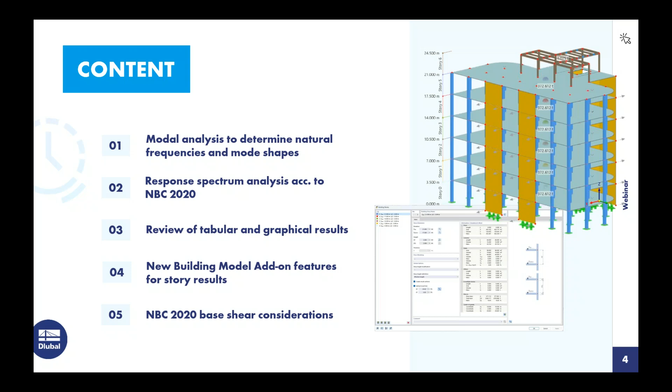So before we begin, I want to discuss the NBC 2020 earthquake methods of analysis that are given in Article 4.1.8.7. So we do have the equivalent static force procedure that is provided in 4.1.8.11, and this is certainly a simplified approach for seismic design. Now, this can be applied for buildings that are of seismic category SC1 or SC2, given in Table 4.1.8.5-B.

It also can be applied to regular structures with a height less than 60 meters and a fundamental lateral period less than 2 seconds. We can also apply this simplified approach for irregular structures, and we would refer to Table 4.1.8.6 to see what categorizes a structure as irregular. But the height must be less than 20 meters, and that fundamental lateral period must be less than 0.5 seconds.

Then we have the dynamic analysis procedure in 4.1.8.12, and this includes the response spectrum method, the time history method, or the nonlinear dynamic analysis. And this should really be applied to all structures that do not satisfy the simplified requirements set forth in Article 4.1.8.7. For today, we'll move forward with the response spectrum method for our structure.

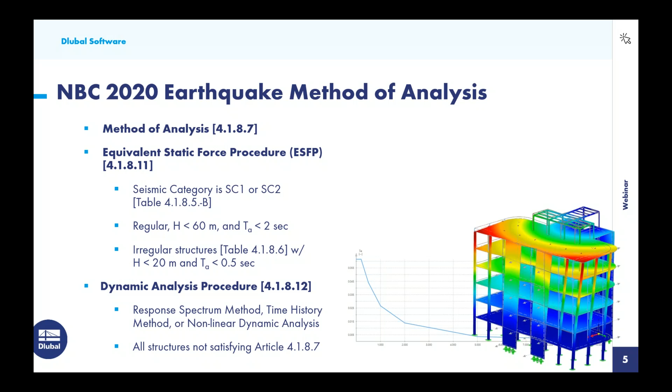So we'll begin in RFEM here, where I have already modeled our multi-level story structure. So we'll quickly go over a bit of the model input as shown over here in the RFEM 6 navigator on the left. So we can see our input materials, and a majority of the structure is defined here as a concrete material with a compressive strength of 40 MPa. But we also have a small steel structure up at the roof level here with a material of A992 steel.

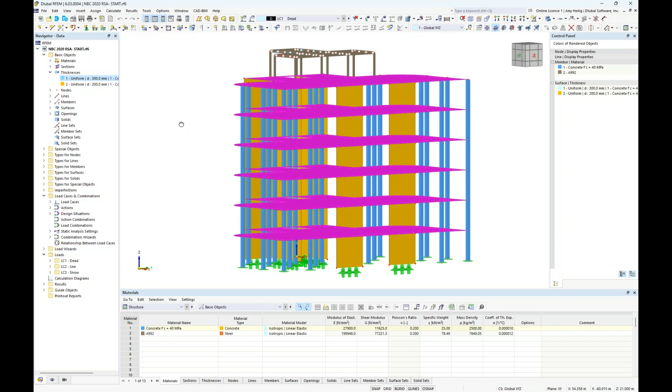As far as our cross sections, you'll notice that our concrete columns that are spanning between floors are just going to be square 350 millimeter by 350 millimeter concrete rectangular sections. And then as far as our steel members, we have several W shapes defined directly from the RFEM 6 CSA library. And finally, we have the thicknesses defined of our surfaces. So this would include our floor slabs here, which are defined with a 300 millimeter thickness. And then we have the thickness of all of our shear walls, which are going to be defined with a slightly smaller thickness of 200 millimeters.

So that's just a basic overview of the structure, but we would also like to take a quick look at the applied loading that, again, I've already added to this particular model. So within our dropdown, we have 3 simple load cases, all gravity loads. The first is going to be our dead load, and this is going to be a surface area load of 3.5 kilonewtons per meter squared applied at every level. We also have a live load, with a modified magnitude here of 2 kilonewtons per meter squared, again applied at every floor level. And finally, we have just a general snow load at the top level here of 1.5 kilonewtons per meter squared. So now that we have reviewed the overall structure and the loading, we want to move forward now with our modal analysis.

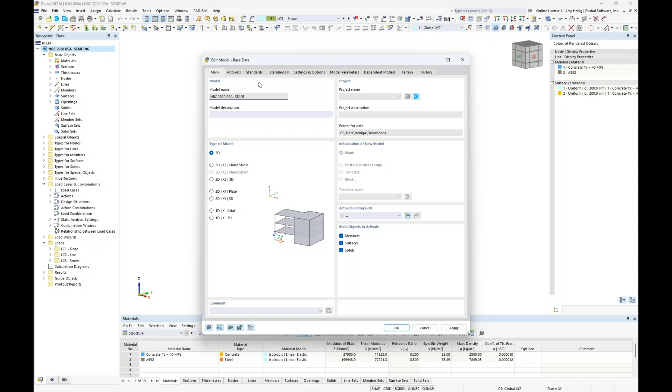So we want to right-click on the model name here in the project navigator to visit what's called the base data dialog box. And this dialog box would be presented to you when you first create a new model within RFEM. But on the second tab are all of our optional add-ons.

So to quickly explain the configuration of RFEM, the base program itself allows us to fully model the structure, including all of the materials and cross sections from the library. We can apply loads and run a basic static analysis. But the minute we want to move forward with design according to the various standards, we would activate one of these add-ons, for example, concrete design, steel design, timber design, and so on. And in particular, today, we want to activate our dynamic analysis add-ons, and we'll begin with the modal analysis.

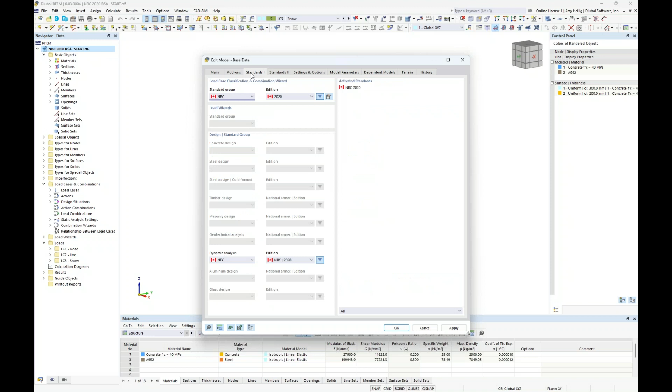So on the third tab, we will generate our load combinations automatically according to the NBC 2020, but we see all of the relevant international standards that are available in the base program as well. And because we have activated now that dynamic analysis add-on, we will go ahead and reference the NBC 2020 here.

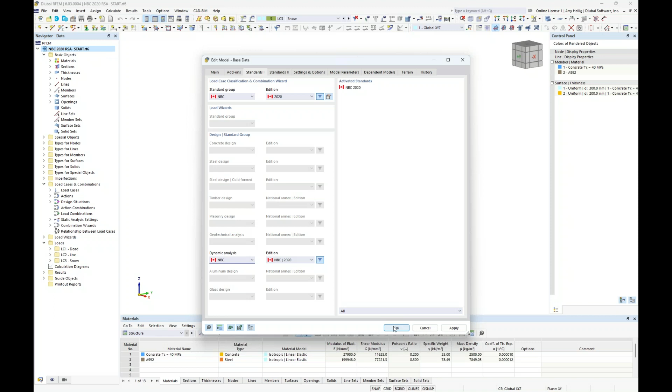So once we have activated that add-on, we will go back into the program and we want to visit our load cases and combinations dialog box. Well, we can immediately pull that up here by editing the active load case. And again, under the load cases tab, we see those 3 simple load cases that we just reviewed, dead, live, and snow, but we're going to create a 4th load case. And the load case name is going to be modal analysis.

Now, because we have activated that add-on, you will notice here that within the dropdown, we now have a new analysis type called modal analysis. And this is only available because we have activated that add-on. So you'll also see a lot of these settings immediately modify in comparison to the static analysis. The first thing to take a look at is the modal analysis settings. So we'll go into the edit dialog box here and we have a couple default options.

The first input is the method for determining the number of modes. So this is by default set to user defined, where we can directly put in the number of mode shapes we would like to solve for. And for today, I'm going to increase this to 10, but you can solve for 10, 20, 50, 100 different modes if you prefer. The alternative method in this dropdown is automatic to reach a maximum natural frequency. So you'll notice that we can input the maximum natural frequency and the program will determine the number of modes needed to reach that particular value.

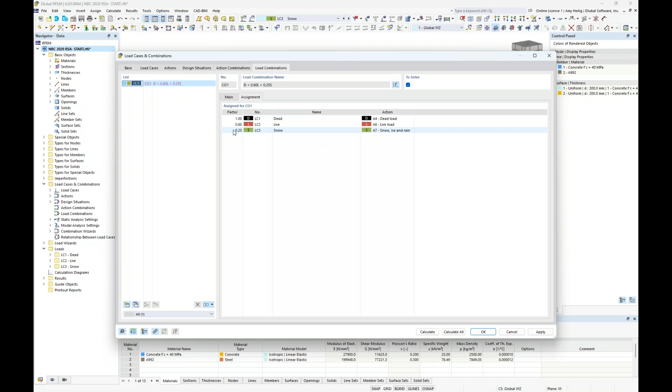And now when we jump to the load combinations, we will see all three load cases considered with the relevant factors directly from the NBC. So 100% of the dead, 60% of the live, and 25% of the snow. So jumping back to our load cases and under the modal analysis, we can now use our drop-down box here to select that mass combination. So now these relevant load cases will be converted to mass.

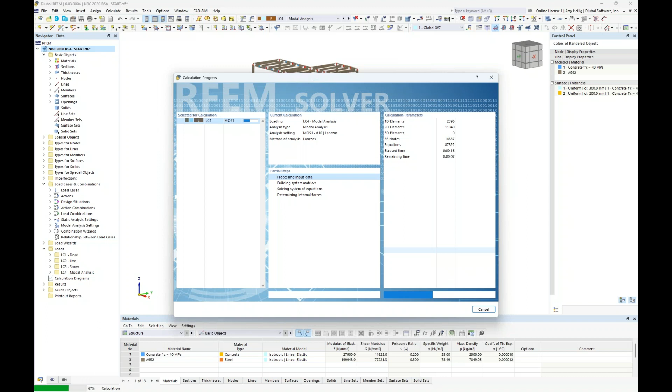Okay, we're now ready to run the calculation, so we can simply hit calculate under this particular load case modal analysis. The program will generate our FE mesh for us, and we are going to calculate a total of 10 different mode shapes. Remember, this is the input that we have input into the particular modal analysis settings. We will also consider the mass conversion of the particular mass combination that we have also set.

So when that calculation is done running, we can take a look at our results. And over on the left, we now have a fourth tab available in the navigator. And within our dropdown, we see here 10 different mode shapes that we can actually cycle through to see the response here of the structure.

So currently we're viewing the mode shape, and notice at the very bottom here, we have the ability to scale the mode shapes. Now the default option is set here so that the magnitude of the mode shape vector is set to a value of 1.0. That's why we see a max value here of 1.0.

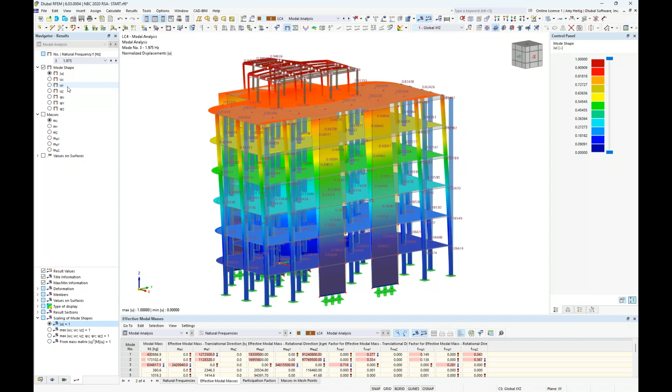But there are some different options we can easily toggle to if we prefer, but most likely we'll be utilizing this first option. So in addition to viewing the mode shape here, you'll also notice the ability to take a look at the masses on the structure used for this modal analysis. And if I zoom in here, we can actually see the mass magnitude at every single FE mesh point that was used in this calculation for our members, our floor slabs, and also our shear walls.

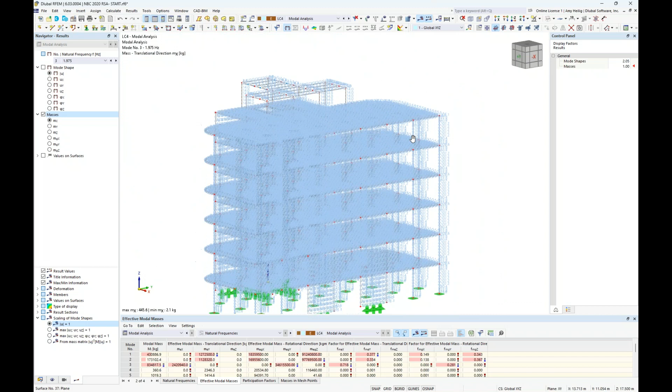So in addition to the graphical output, we certainly want to visit the tabular output here. So once this calculation is complete, we should also see the ability within our dropdown to jump to the modal analysis add-on to view our results here. And the first tab under the natural frequencies includes those 10 different mode shapes as well. So we can kind of cycle through these by clicking in the table, and notice the graphics will automatically update.

But this allows us to view the angular frequency, the natural frequency, and the natural period of our structure for those 10 different modes. Now, it's really important to also take a look at the effective modal masses. And within this is going to show us our mass participation for each mode shape. Well, we can immediately tell what our dominant modes are here, just based on the most mass participation. So mode shape 1 would be our dominant mode in the Y direction. And we can also view mode shape 3 here, which would be our dominant mode in the X direction.

And down at the bottom of this table, we will actually get a summation here of the mass participation. So in the X direction, we have 72%, and in the Y direction, we have 89%. Well, if we refer to the NBC commentary, and currently only the 2015 is released, we don't have access yet to the 2020, but I would imagine it would say the same thing, in that a 90% mass participation is required for this modal analysis. And we're certainly not reaching that with these 10 different mode shapes here.

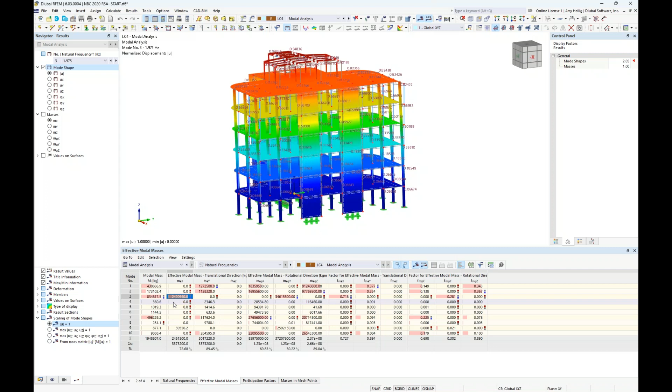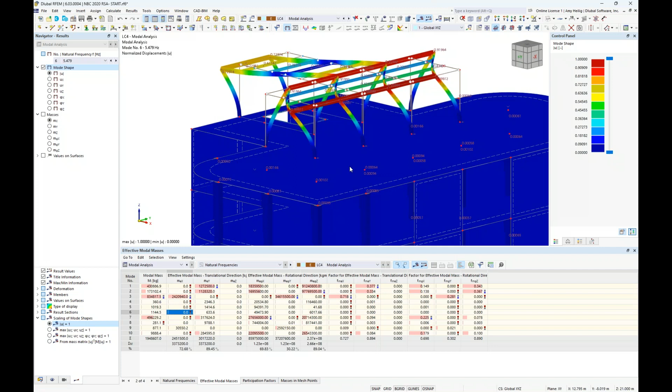Alternatively, if we take a look here at mode shape number 4, for example, you'll notice that really not much is going on with a majority of the structure. Rather, we're seeing a response up here for these smaller steel members only. Same concept with mode shape number 5 and mode shape number 6. So we term these usually as local modes, where again, not much mass participation, but we're seeing very little response for just maybe a few members. So I'd really like to eliminate these local modes in my calculation.

And we're going to go back to the modal analysis here and revisit these settings. Under the Settings tab, remember we have this currently set to no neglection, but what I would like to modify this to is to user defined, where I now have an additional third tab here to neglect masses of a particular object that I select within this dropdown. And for today, I'm going to deactivate the masses for all of my steel members located at that top level.

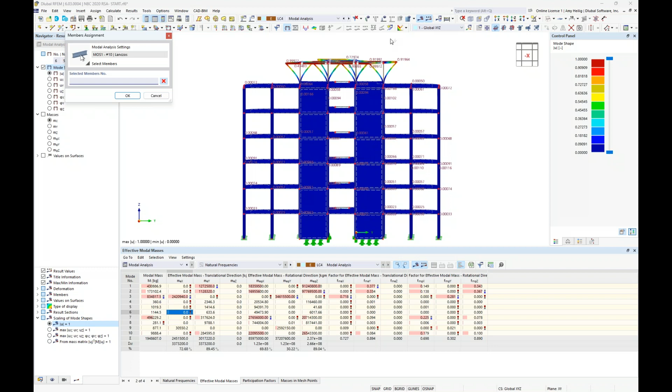And I can graphically select the steel members here. I'll turn off my results. Maybe I turn this into a rendered view by graphically using my selection box here to highlight all of the steel members. Now notice the member numbers are automatically populated. So now we're going to completely neglect the masses for those particular elements. But if we would still like to consider the masses and maybe just redistribute to a different area of the structure, we can do so.

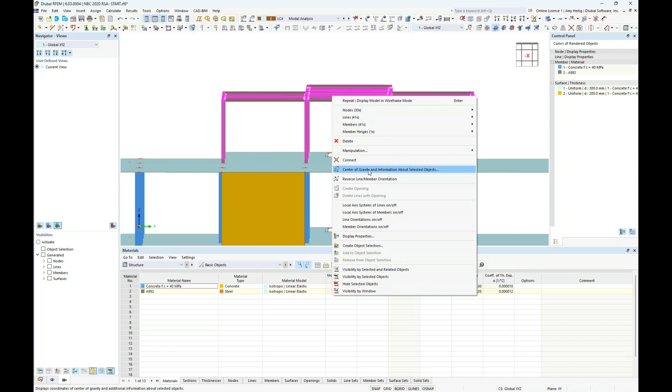So if I highlight all of these same members, again, these steel elements up at the top, I can right click to take advantage of this option here called Center of Gravity and Information about Selected Objects. And what you will notice is that the program will give me the total mass here of the selected objects, 3.075 tons. Well, I can take this a step further to generate a new node at the center of gravity with the selected objects, and we see that generated here in the background.

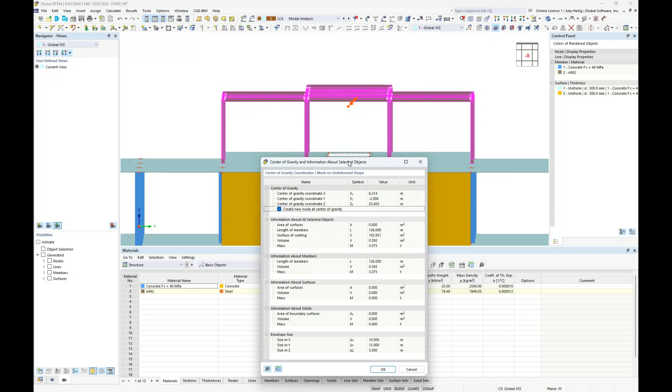So once I've created that additional node, I'm actually going to double click on it because I want to modify the Z elevation here to 21 meters. And by doing so, I just have simply moved this node to the top story here of the concrete structure itself.

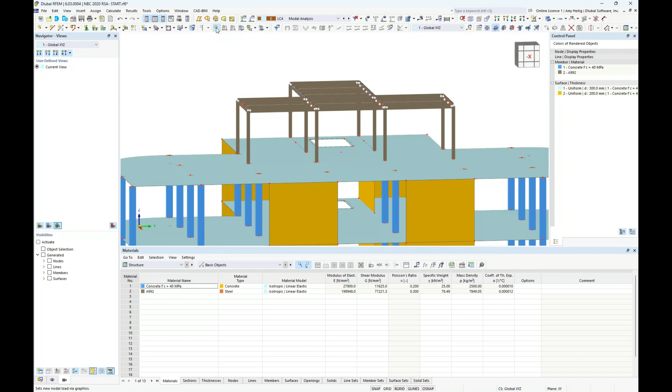Well, now we are going to apply a new nodal load. So I choose my option directly up here in my quick tools up at the top. And instead of the load type set to the standard force, we do have the ability to set a mass load type. And again, taking into consideration the total mass of those selected steel objects, I'm going to simply redistribute it here at 3.075 tons.

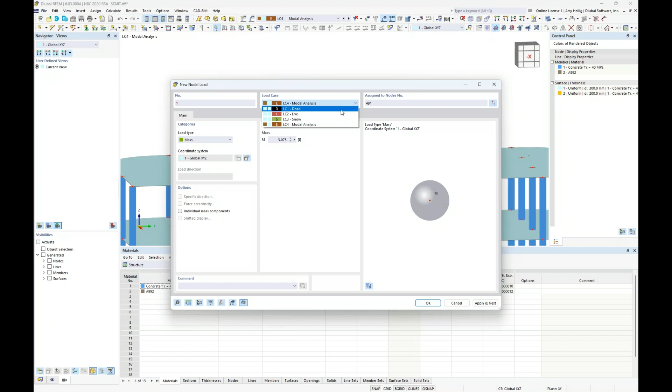And I'm going to apply it to node number 491, or we could graphically select that node. But we do need to make sure that we are under the relevant load case here. So we want to apply that to the dead load case. So when I click OK, the program asks me to delete the results, and we turn this into a rendered view here. And now we see that mass load applied directly to that node,

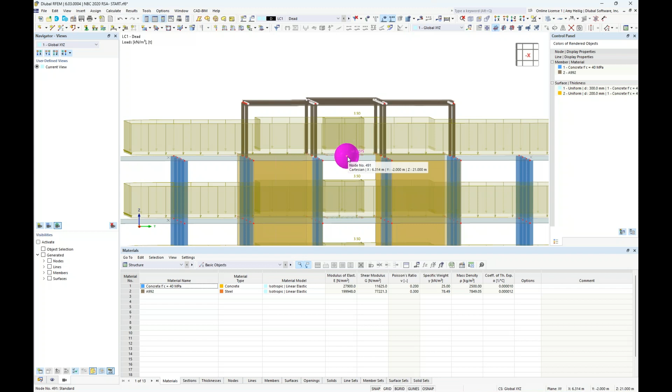again, at that top slab here of our concrete structure. So we have the ability to apply mass loading as nodal loads, as we just saw, or line loads, member loads, or surface loads to be considered further within the modal analysis directly.

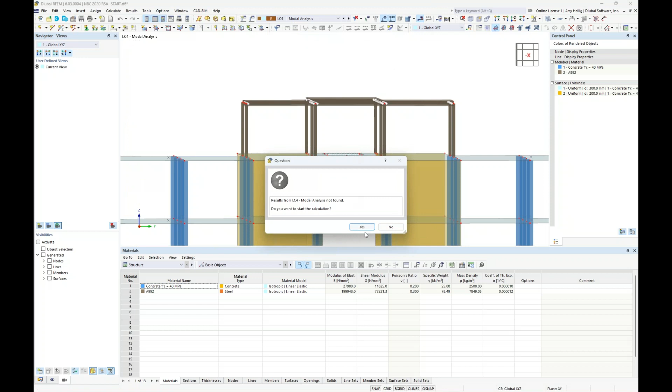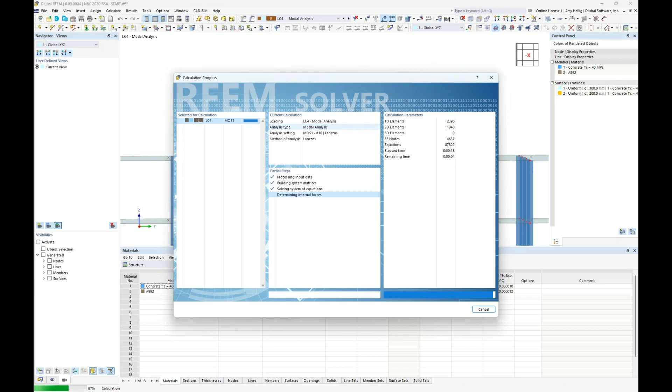So we jump back down here to the modal analysis. We're going to rerun this calculation, and remember now that we are completely neglecting the masses from the steel members, but rather we have now inserted that single point mass load at the top of the concrete structure to simply redistribute the mass. And our hope is, by still solving for 10 different eigenvalues, that we see slightly better mass participation.

So once the results are finished here, we can go ahead and zoom out to see the overall structure. We're currently looking at the modal analysis add-on and the effective modal masses tab. And we take a look at the bottom here for the summation of the mass participation. And now we have 96% in the X direction and 96% in the Y.

So you can see by eliminating those local modes, we don't need to solve for more eigenvalues, but rather what we see here for mode number 4 and mode number 5, that previously had not a whole lot going on for the rest of the structure, actually look quite good now with a response of the overall structure instead.

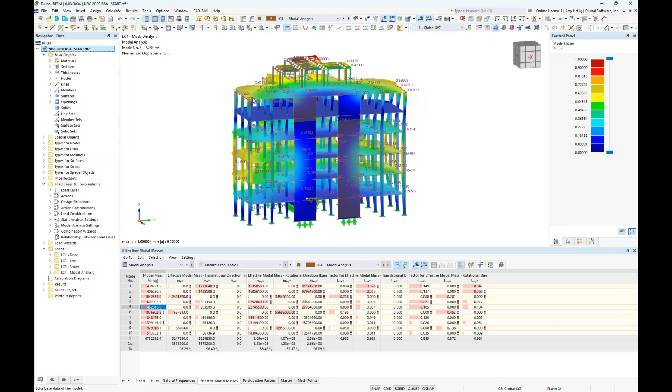Okay, so now that our modal analysis is complete, we have met those 90% mass participation requirements set forth by the NBC. We want to move forward with a response spectrum analysis. So we will go back to the navigator and the first tab here to revisit our base data dialog box. And under the add-ons, you can see that we also have the ability to activate our second add-on, response spectrum analysis.

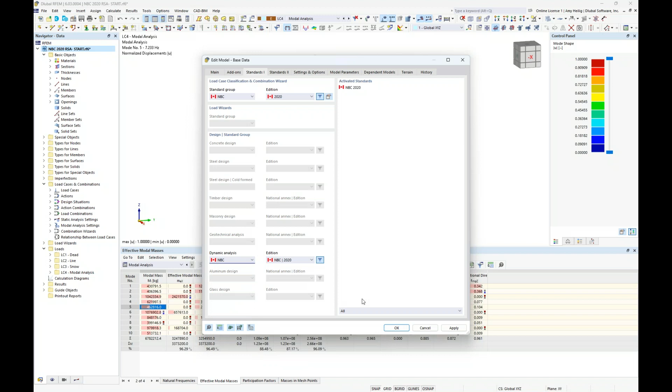And under the standards, we're making no modifications here. We're still running that response spectrum analysis according to the NBC 2020, but I just wanted to point out all of the other international standards that we have available, including the ASCE 7, the Eurocode, and several others. So we'll go ahead and click OK to get back here within the model where we will revisit our load cases and combinations dialog box.

So we will create a fifth load case here, and this one is going to be called RSA for Response Spectrum Analysis Design. Within our drop-down box, we now have a third option available to us, the response spectrum analysis. Now, before I get into some of these settings here on this first tab, I'm going to go ahead and go over the additional tabs.

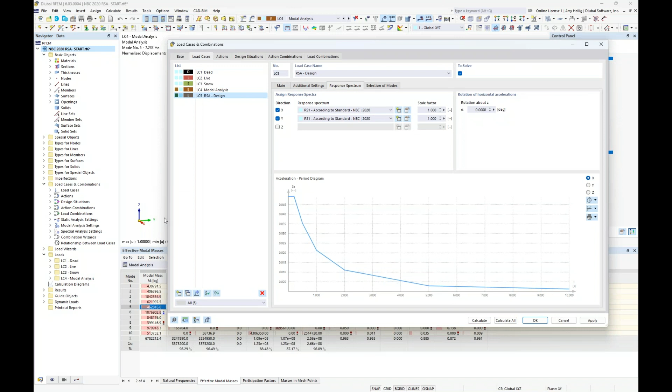As far as additional settings, this is actually not something that you need to worry about with a response spectrum analysis. With that dynamic add-on, it's really more relevant for a time history analysis. So we'll make no changes here. Under the response spectrum, we are interested in applying this response spectrum in the orthogonal X and Y directions. And this is just based on these global axes here in the background of the RFEM model directly.

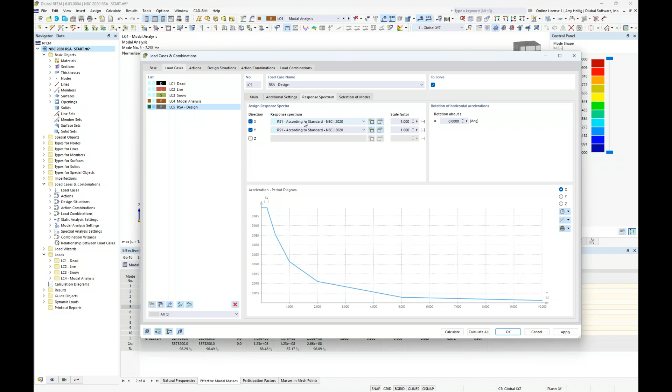Now, of course, if we were also interested in a vertical seismic response spectrum, we would activate the Z direction as well. The program has automatically set a response spectrum definition type here according to the NBC 2020, but we can go ahead and edit the settings within this particular definition type.

So as far as generating this response spectrum, we have several options within the dropdown. The first is user-defined, where notice that you can input directly the period, the frequency, the acceleration, and this diagram will be automatically created based on this input. Alternatively, we have the ability to consider from an accelerogram.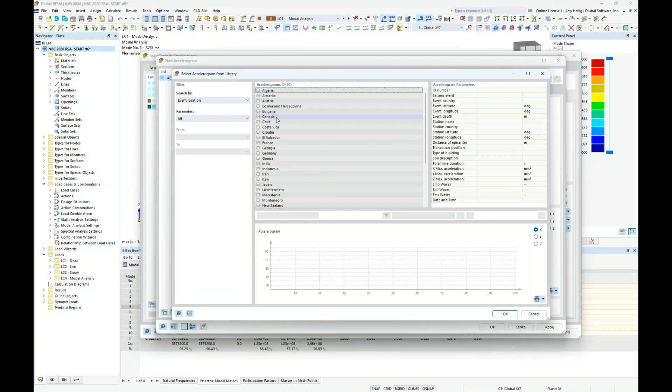So with the accelerogram, we can take a look at the RFEM library directly, where we have several recorded earthquake events from all the various countries, including Canada here. So we could select one of these particular accelerograms to be considered for our response spectrum analysis.

Now, finally, the last option here is according to the NBC 2020, which is what we'll be moving forward with today. Now, it's very important to note here that under the spectrum type, we have two options, the elastic and the design. We'll actually touch on this at the end of the presentation today, but for now, we want to choose the design spectrum. And once we have set the spectrum type, we do need to input several variables here, including the spectral response acceleration for the various periods.

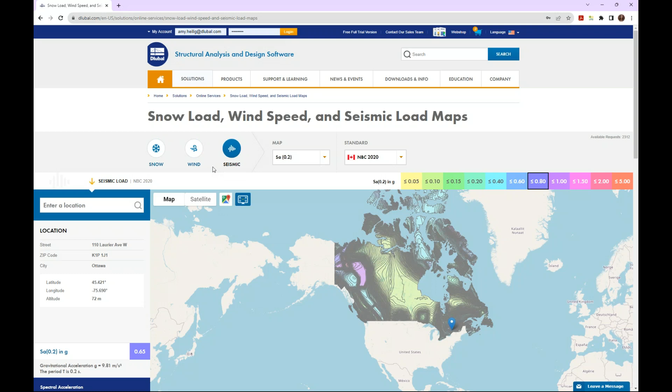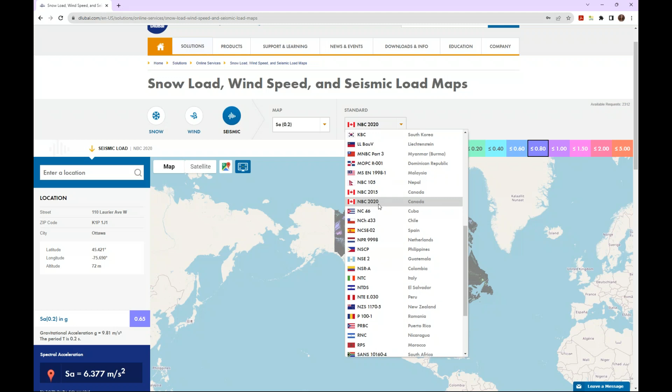Well, I wanted to point out that if you do visit our website at dlubal.com, under solutions, we have what's called the snow, wind, and seismic load maps, or in other words, our geozone tool. So you can see the various hazards that we can select at the top here. And for today, I have selected the seismic. And we also have implemented multiple standards from around the world, including the ASCE 7, of course, the NBC 2020, and all of the rest of the standards available here.

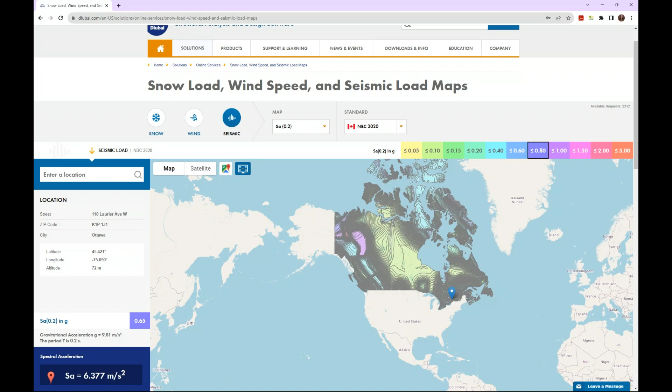So once we have selected our standard, this is also integrated with Google Maps technology in the sense that you can simply input your project location, such as an address or perhaps a city. You can go ahead and select as well within the drop-down these several options that are needed for a response spectrum analysis, and the program will instantaneously return the correct information to you, again, based on the NBC. So maybe a little bit more efficient than flipping through maps. So certainly take a look at this GeoZone tool available on our website.

So once we have this information, we would of course input it into the table here. We would also set additional factors such as the importance category. So for today, perhaps we set this to normal. We would set the site coefficients such as the site class, and today we'll set this to site class C. Then we also have the ductility related force modification factor, R sub D, and the overstrength related force modification factor, R sub O. Once all of the relevant information is input here, we see the response spectrum diagram automatically created down here at the bottom.

So we go ahead and click OK, and we want to ensure that that response spectrum is applied in both the X and the Y directions within this dropdown. The final tab here is the selection of modes. So what you'll see listed are the 10 different eigenvalues that we solve for from the modal analysis. And what's nice is that we also get a nice summary here of the mass participation in the X and Y directions. So 96% in both the X and the Y directions, as we have already taken a look at the previous results back in RFEM.

Well, if we are interested in deactivating some of these mode shapes with very little mass participation, so for example, if we set this to 4%, notice that a couple of these modes are deactivated, yet we can still double check to make sure that we're still meeting this 90% requirement, and sure enough, 96% in the X and now 94% in the Y. Well, this just allows us to maybe speed up our calculation quite a bit without having to worry about some of these mode shapes that are not contributing much to the mass participation of the overall structure. So in this case, modes number 8 and 10 will be unchecked here.

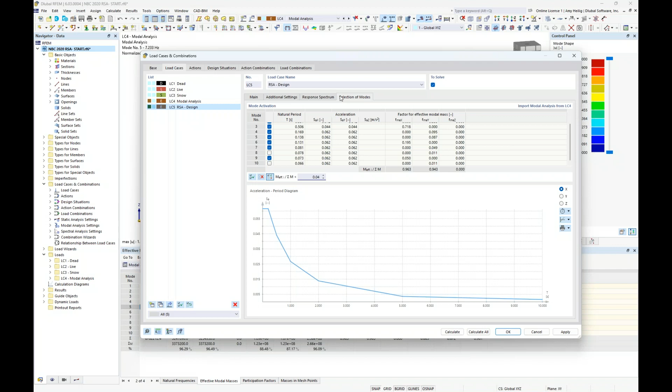So now that we are complete with these additional tabs up at the top, we go back to the main tab to talk about these spectral analysis settings. And again, by default, we do have a definition type set here. This will allow us to set the modal combination method for the periodic responses, and we have 3 different options available. We can take into consideration damping for the CQC rule, and we also will need to set the combination of the directional components, again with 3 different options available here.

So this is a really important topic, therefore I'm going to jump back to the PowerPoint to explain this in more detail. So we'll begin first with the modal combination method, and that's that first drop down available to us. So I'm going to jump ahead here in this PowerPoint to what you would ultimately see in your result output once we do run this response spectrum analysis. So remember that we're solving for 10 different mode shapes, or maybe we've deactivated a couple of those.

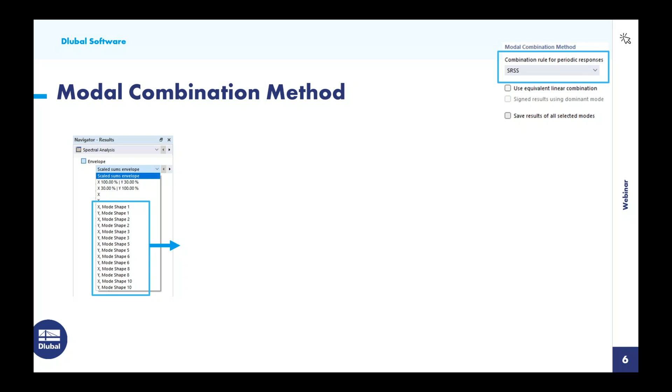So we're going to apply this response spectra analysis in both the X and the Y directions for all mode shapes selected. However, we need to somehow combine these so that we get a single response in the direction X and a single response in the direction Y. And within this dropdown, we choose the method of how these will be combined.

The first is going to be the square root sum of the squares, the SRSS rule. And this is where we're going to combine the max results by squaring them, adding them together, and taking the square root. Of course, you'll notice that when we do this, we will lose the signage. The second option looks very similar here, but you'll notice that we have an additional coefficient epsilon that's included within this equation, and this is the correlation coefficient. The equation for epsilon is shown here, and the big difference between the CQC and the SRSS is we have the ability to consider damping.

And finally, we have the absolute sum. This is just where the modal analysis is conservatively superimposed. So certainly, again, the most conservative approach. So once we have chosen the relevant method, what we will see in our result output is, again, a single response in the X and a single response in the Y.

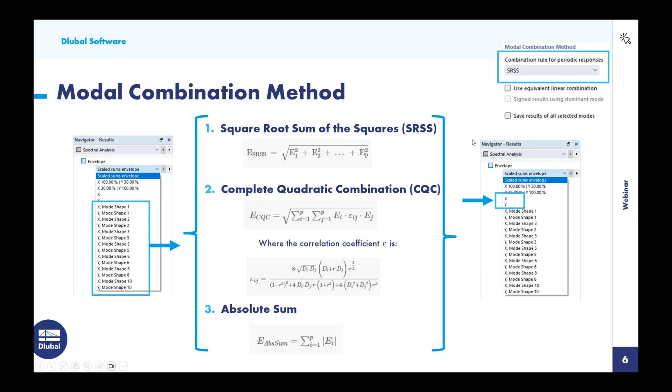So the standard SRSS and CQC combinations, those first 2 methods that we were talking about, inevitably we're going to lose the corresponding internal forces. And what I mean by this is that if we take a look at, for example, a column's max axial force, we'll lose the corresponding moment in the results when we combine these. This is why we have an additional checkbox option right below this called the equivalent linear combination. And this will essentially give us a more realistic result as well as the correct signage.

So taking a look at the square root sum of the squares, SRSS, with this option checked, we see the modified equation shown here. Very similar, we have the CQC with the linear combination checked. Again, we'll see how these formulas vary slightly from the formulas shown on the previous page without the equivalent linear combination activated.

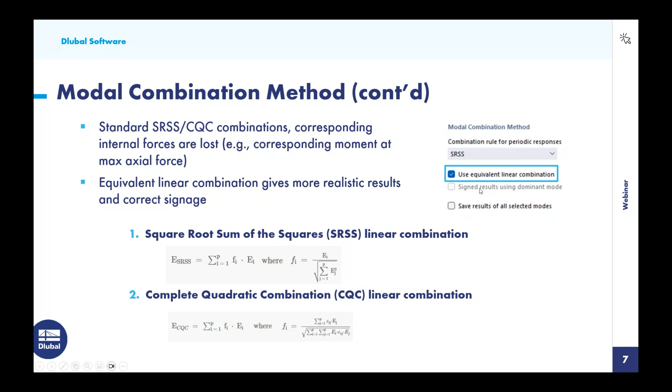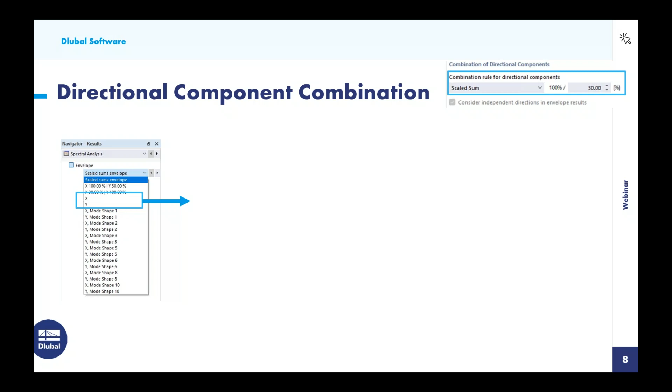And finally, we have our final dropdown within these options for the directional component combination. Well, we now have a single response in the X and a single response in the Y, but we know that earthquake loads don't necessarily always act 100% in the X direction of our structure or 100% in the Y direction, but rather it's usually a combination of both. So the question is, how are we going to further combine these for our eventual design of the structure? And again, we have three different options here.

The first is going to be the SRSS rule once again, where we square them, take the sum, and then take the square root. The second option, and probably the more common approach if we are designing to standards such as the NBC, is the scaled sum or the 100/30% rule. This is where we are going to consider these independent directions, but we're going to take 100% of the X and add it to 30% of the Y. Now, if we were also considering a vertical seismic in the Z, we would additionally add 30% in the Z. And we'll create a second result here with 30% in the X plus 100% in the Y.

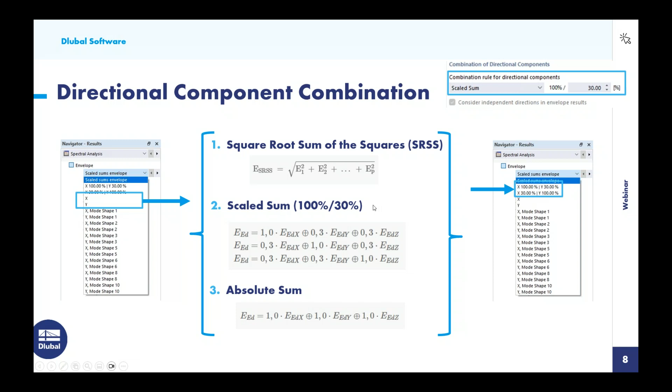Now, the final option for this method is the absolute sum, and this is just simply where we are going to add 100% of the X to 100% of the Y and possibly 100% of the Z. So again, the most conservative approach there. But assuming we move forward with the 100/30% rule, which is exactly what the NBC calls out if we refer to Article 4.1.8.8.(1)(c), we should see two results further output in our results for the response spectrum analysis, exactly as we just discussed here, in both orthogonal directions.

Okay, so let us go back to RFEM yet again to choose the combination rule here. Just notice that when we have the CQC selected, we now have the ability to set that damping ratio here on the right-hand side. But today we'll move forward with the SRSS with the equivalent linear combination. Now, the signed results using the dominant mode, this is currently grayed out. We determined that with the way that the response spectrum analysis is carried out, there could be results that are unconservative if we were to apply this method here.

So instead, in the near future, what we plan to do is to explore the option of exporting out the equivalent loads from the seismic response, and then we could certainly take advantage of options such as this for the signed results. But for now, you'll see that disabled.

The saved results of all selected modes. Remember, we're combining all of our mode shapes in the X and Y direction according to the SRSS. This just simply allows us to view the structure's results, including deformations, internal forces for each mode shape as well.

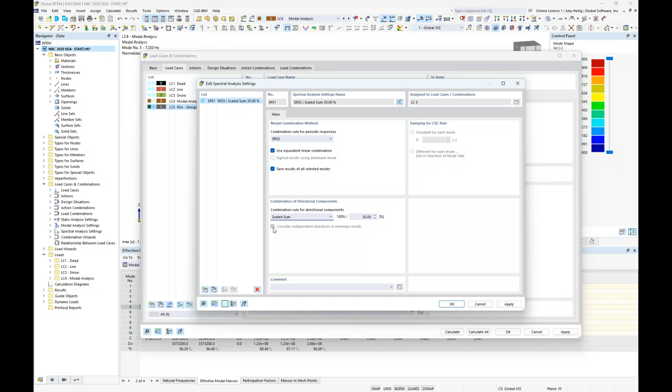The combination of directional components, as mentioned, we will refer to the NBC to set that 100/30% rule. You see a checkbox activated here in the background. This just means that ultimately in our results, we will give you an envelope solution. So the max and min results for the 100/30% rule, but we will also consider 100% in the X and 100% in the Y in those envelope results as well. So this is checked by default.

So once we have set this information under these particular settings, we want to import in the modal analysis from the load case. Well, we've only run one modal analysis for today under load case 4, but we could create multiple load cases for different modal analyses, and why this might be beneficial if we were making some experimentations with different mass combinations, neglecting masses, or whatever it may be, we would have the ability here to select a different modal analysis.

And finally, we have the consider accidental torsion. So for this, we refer to the NBC article 4.1.8.12.4 that tells us we do need to consider accidental torsion in our response spectrum analysis. And we do so by setting here 10% in both the X and the Y directions. And this is based on the building length in both of these orthogonal directions.

And notice the program automatically calculates what this building length is, but if we would like to override that, we could certainly do so. But essentially, internally with our response spectrum analysis results, an additional moment will be applied at every single FE mesh point to consider those code requirements.

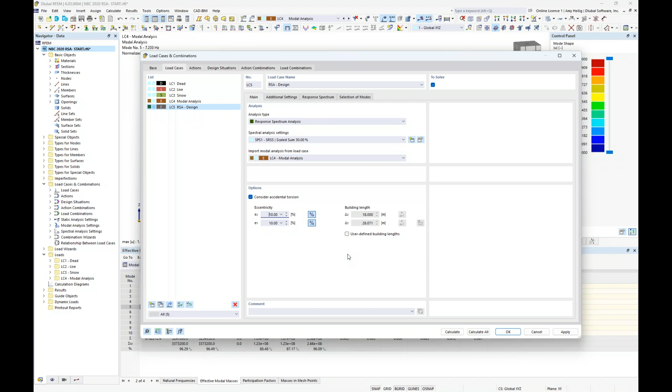So we are now ready to run our calculation. Once again, you'll notice here that we have several input options that it's solving for load case 5 here for that response spectrum analysis. And this is just simply because we are considering all of the 10 different mode shapes, except for the 2, of course, that we deactivated, in both the X and the Y direction, applying that response spectrum analysis to each mode shape, and then combining according to the relevant settings that we just discussed within the PowerPoint.

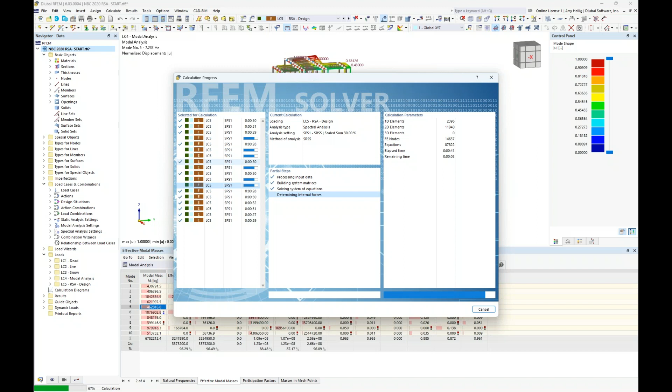What else is new within RFEM 6? You'll notice that these are being solved simultaneously, taking advantage of the multi-core processor within your computer. Previously in RFEM 5, it would require each of these calculations to be run one by one.

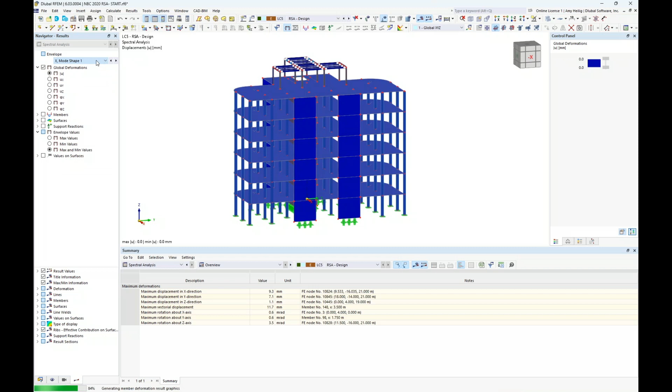So now that the calculation is complete for the response spectrum analysis, we will jump yet again to our navigator here to this 4th tab where we see our results within this dropdown. And just like what we were discussing within the PowerPoint, we have all of the various results here for the individual mode shapes in both the X and the Y directions. But we also have 100% in the X, 100% in the Y. And we have the combined 130%.

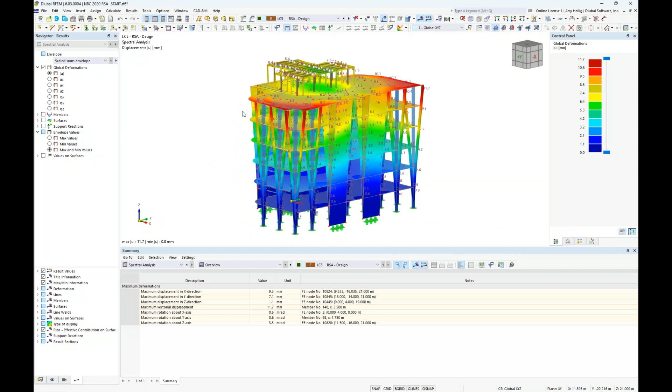And finally, we have the scaled sums envelope, and this is going to be that envelope solution that includes the 130% rule, but also 100% in the X and Y. And you can see the envelope values can be activated here. Currently, we're looking at the max and min values. That's why we kind of see duplicate results here for our deformation, but we could set this to the max values only or the min values only, or keep this as both.

But in addition to the global deformations of the structure, we can also view information such as the member internal forces. So perhaps I change this to the max values only, and I'll change this to wireframe view. We can view the maximum axial forces in our columns from our response spectrum analysis, or the shear forces or bending moments.

Same concept here for our surfaces. We can activate the bending moments. We can also activate the color navigator over here. We can take a look at shear forces or those normal forces within the structure for those particular surfaces.

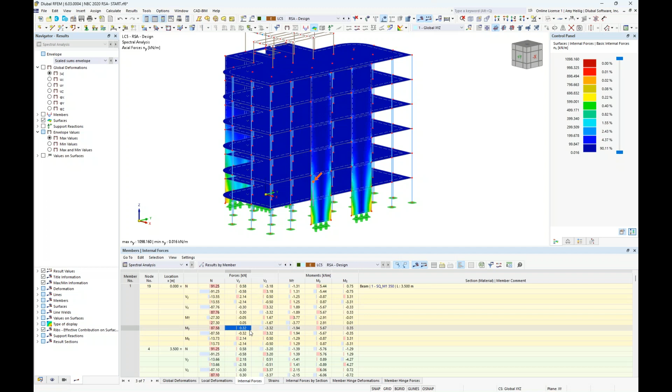Now, all this information shown graphically is also available in table format, similar to our modal analysis, but this time we jump to the spectral analysis add-on, and we can view here the results by member. So information like those internal forces for each individual member, and we can go ahead and turn off our surfaces here. Notice that everything is synced up in the background to show me exactly which member I'm currently looking at. We can export this to Microsoft Excel if we're interested in further sorting capabilities. Same concept here for the results by the surfaces as well.

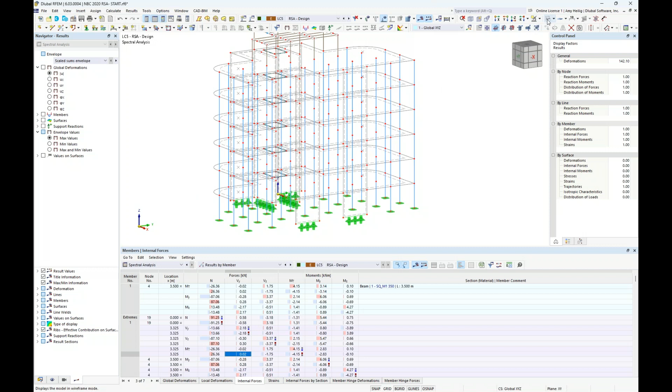So a very important result interpretation from the response spectrum analysis is, of course, the topic of base shear or story shear. And previously in RFEM 5, what we needed to do in order to get this information out of the program was to typically take one of these column stacks here to make a copy of it. Then we would move it over here to the side of the structure, change the member type to something called a result beam. And the result beam would then sum up all the internal forces here for all of the selected objects.

But now in RFEM 6, we actually have introduced a new add-on called the building model add-on to better organize this result output with the response spectrum analysis. So we'll go back here to our base data by right-clicking on the model name. And similar to what we saw here with our dynamic analysis add-ons, we can now activate the building model add-on.

So keep in mind that RFEM is a nonlinear general FEA program. This means that yes, of course, we can model, analyze, and design buildings, but we also can model domes or silos or fabric tensile structures, or maybe it's an FEA of a steel connection. All of these different model types are possible. So what we're hoping to do here with the building model is to integrate more of those building specific features within a general FEA program.

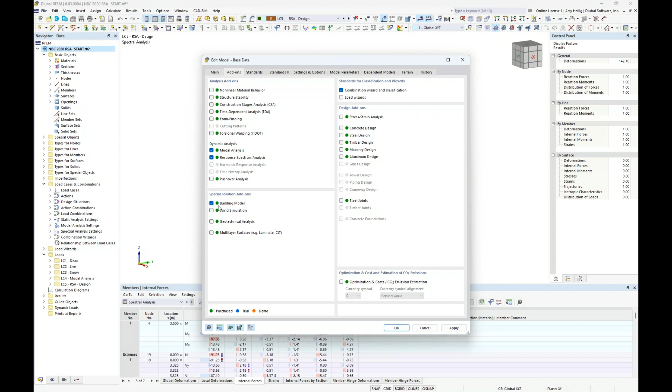And this includes topics like diaphragms, shear walls, spandrels, and I will refer you to the webinar that I presented last month on concrete design according to the CSA A23.3, which is on our website and our YouTube channel, where I actually go into a little bit more detail than what we have time for today with this building model add-on. But for today, we will go ahead and activate this here. And ultimately, what many other software companies are doing with two separate programs, with FEA as well as building specific, we're trying to integrate into a single program with RFEM.

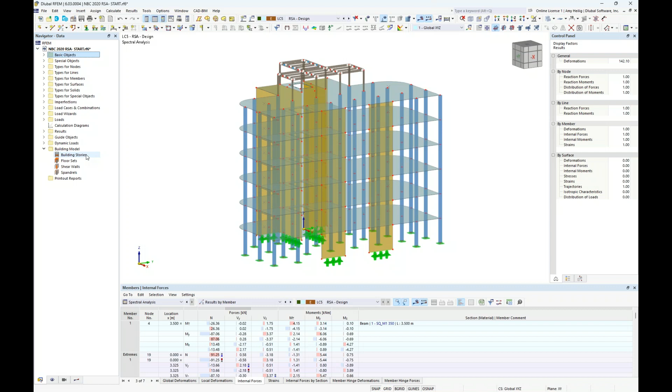Now, at first glance, it appears that not much has changed when we have activated that building model add-on, but I'm actually going to right-click here in one of my folders within my navigator to collapse all of them, just so it's a little bit easier for you to see that we now have a new folder option here called building model. And what we need to define are the various building stories for our structure today. And we do so by right-clicking to create a new building story. The first story is by default automatically created here, but we do need to tell the program what's the base of this story and what's the top of the story.

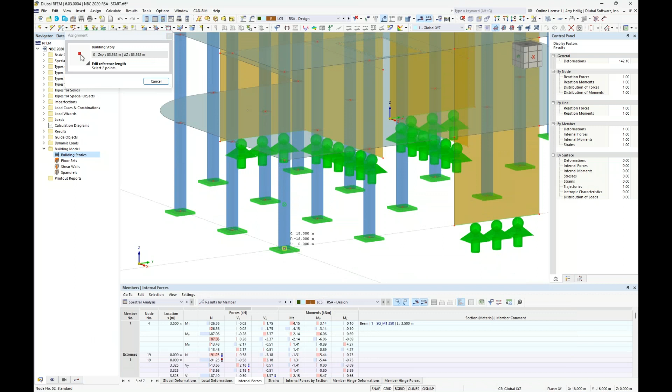And we can do so by graphically selecting 2 points. So I'll scroll down to the base of the structure to select this point at the bottom. And then my second click is going to be at this first story height. And actually, let me click that again. Looks like I had toggled to a different point. So we see a total height here of 3.5 meters. Now, I want to also point out that over on the right-hand side, we have a nice table format that includes all of the information such as area, the length, the volume, the mass for all of the objects at this particular story level only.

We also have the ability here to define a rigid diaphragm or a flexible diaphragm. Semi-rigid diaphragms are also currently in development and will be released at some point in the future. Now for today, we won't define any diaphragm. We're just going to keep this as the standard surfaces that we already have modeled in RFEM.

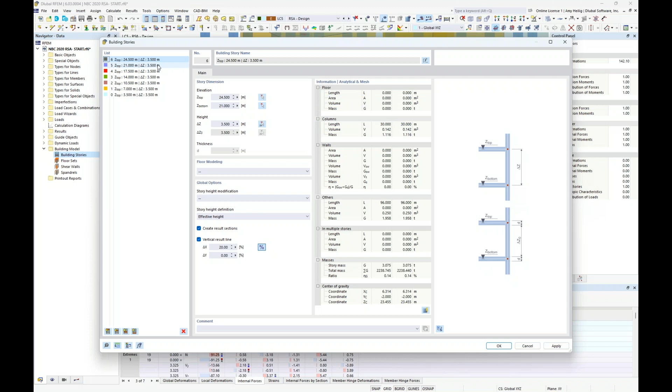We want to continue adding the additional stories by doing so with our button in the lower left-hand corner here, all the way up to story number 6. So the program automatically assumes we have the same story height of 3.5 meters at each level. If you did need to modify that, you could certainly do so. But again, all of the relevant information for this particular story will be displayed on the right. And now when we click OK, if we zoom out here and we kind of rotate the model around, notice that we have a graphical output of each story level shown, clear up to including the steel structure up at the top.

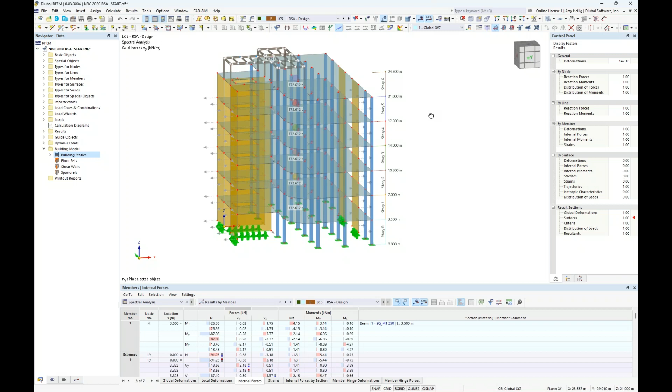So with the results from our response spectrum analysis, the only thing that we need to do here is to revisit our spectral analysis option within our first dropdown, but we now have a new result option called results by story. So I don't need to rerun the calculation. The program just automatically sums up the results that I already have.

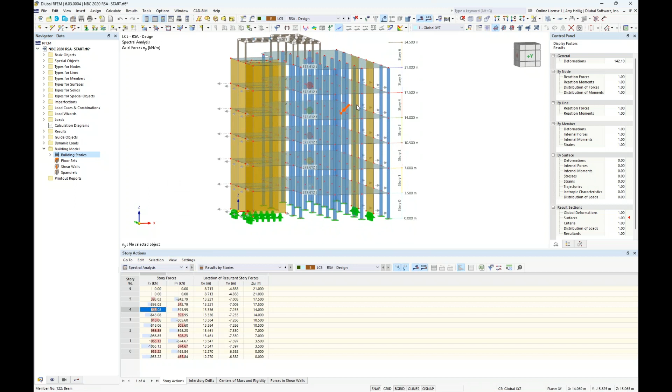And now we see under this first tab, probably the most important information related to that response spectra analysis is our story shear presented at each level. So we're seeing the max and min shear force in both the X and the Y direction, again, output at each story. You'll also see the location of the resultant story force shown here with that red arrow.

And we would probably take a look at the base of our structure to determine what that base shear is, again, from that NBC response spectrum analysis. The second tab is the inter-story drifts, so we can view the drifts as well at each story level. Again, previously in RFEM 5, this information was a little bit more difficult to get out, but now in RFEM 6, with this building model output, we can directly see this at each story level.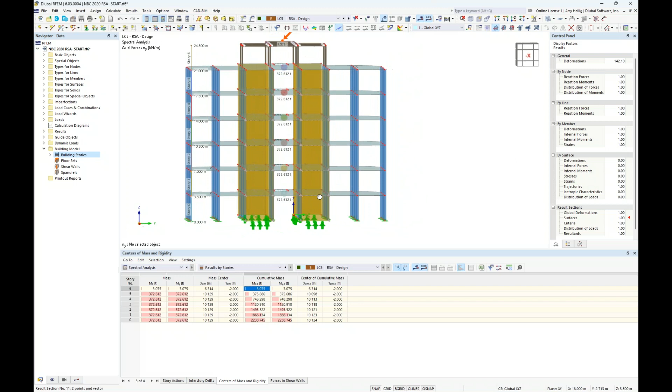The centers of mass and centers of rigidity are displayed here within table output under this third tab, so we can see centers of mass are actually also displayed here with these particular round circles, or this mass ball at each particular level. Centers of rigidity would be available if we had rigid diaphragms defined, which we don't for this example.

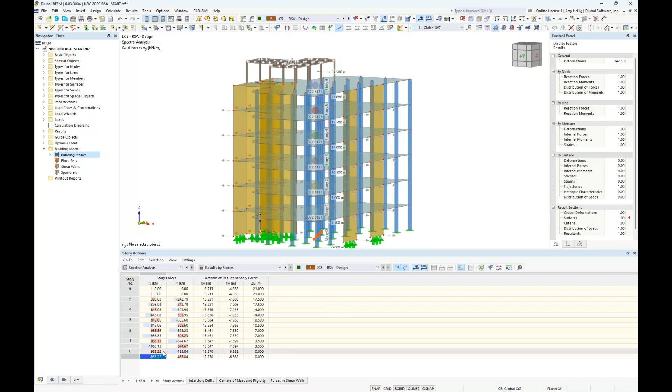And the final tab is the forces in shear walls. So we can actually sum up all of the internal forces for these vertical shear walls at each story level as well. So going back to the base shear, I want to switch back over to the PowerPoint to explain the requirements from the NBC 2020 when we are talking about base shear.

So let us begin with a basic overview of some of the shear variables that are defined within the NBC. We begin here in Article 4.1.8.12.5, where we can see that the elastic base shear from the dynamic analysis is denoted with V sub E. So this is purely the base shear with no factors applied to it. We then have the adjusted elastic base shear in 4.1.8.12.6, and this is V sub ED. This adjusted elastic base shear is calculated with this factor shown out here in front multiplied by the elastic base shear V sub E.

And this factor isn't always applied to the structure. There are certain criteria when you should apply it to your particular building. You'll also notice that we need to take the max of the equation shown here on the left versus the equation shown here on the right, but both of them should be less than or equal to 1.0.

Moving on in the NBC, we then have the specified lateral earthquake force from 4.1.8.12.7, V sub D. V sub D is calculated by taking that adjusted elastic base shear and multiplying it by I sub E, which is the earthquake importance factor. And we further divide by R sub D, which is the ductility related force modification factor, multiplied by R sub O, the overstrength related force modification factor.

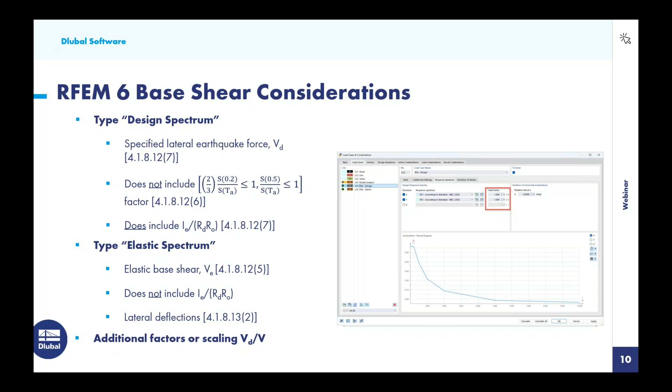So let us go back to RFEM here, and I'll quickly show you how we can consider that elastic design spectrum. So going to our load cases and combinations, I'm going to make a complete copy of load case 5 here. And instead of my response spectrum analysis for design, I'm going to rename this to elastic. Now, all of the previous settings are also copied over, so I don't need to make any modifications to this. But under the response spectrum type, I'm going to edit the definition type here to also create an exact copy of my existing response spectrum definition. And up at the top, I'm going to modify this to elastic.

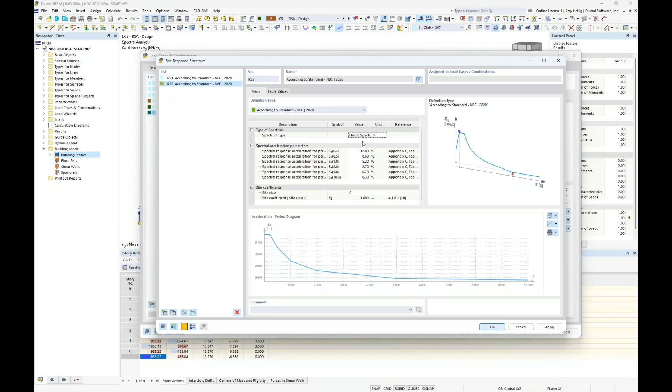Now notice that a lot of the input criteria is now gone, and that's again because we're not considering those additional factors here with our response spectrum analysis with the type elastic. So now that we have this second definition type here for elastic, I can simply select it in my drop-down box. And we would rerun the calculation. We would take a look at the building model results, and in particular, the drift, to make sure that our drift is limited to what Article 4.1.8.13 has set forth.

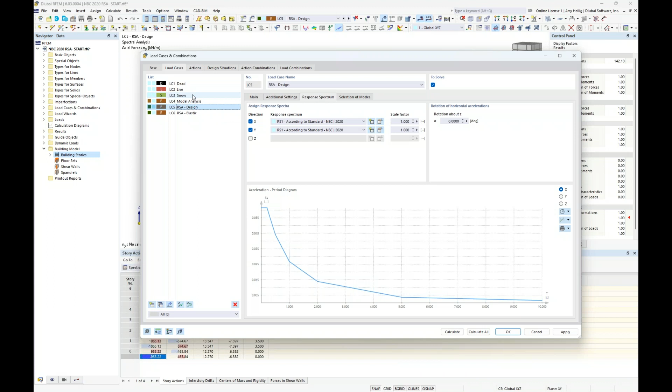No need to run that calculation now. It's really the exact same workflow. I just wanted to show you how we can essentially consider that elastic response spectrum analysis. Now, the final topic to cover is we now have our earthquake loads from this design response spectrum. How do we combine this with the other load cases such as dead, live, snow, or perhaps we have additional lateral loads like wind analysis?

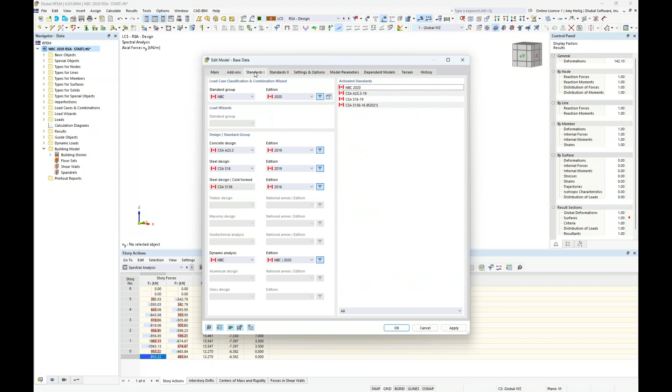So if I go back to my base data, we probably would carry out the design here utilizing the concrete design add-on or the steel design add-on. Notice we have timber for CLT structures, aluminum, we have cold-formed steel, whatever it may be. And under the third tab now, we get some additional options to carry out this design specific to the CSA standards for both concrete and steel.

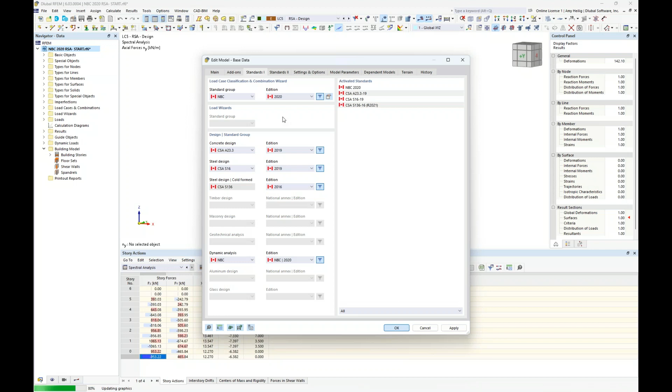But for today, I just want to briefly show that we would probably, again, carry out the design of our structure utilizing these design add-ons. Well, if we go back to the load cases and combinations, and we take a look at the design situations. Again, I had mentioned that the program will automatically create these two design situations, and we'll go ahead and activate them again for the ultimate limit state and serviceability limit state that we'll eventually use within the concrete and steel design add-ons. That's why they're both checked here.

If we take a look at the load combinations that are generated from these two design situations, you'll see here that I don't see earthquake listed at all.

And the reason why is because these load combinations are being generated according to a nonlinear second order analysis to consider those P-delta effects. But we know that we cannot simply add the earthquake loads to these additional load cases using superposition, because we can't combine second order effects and just add them together like P-delta.

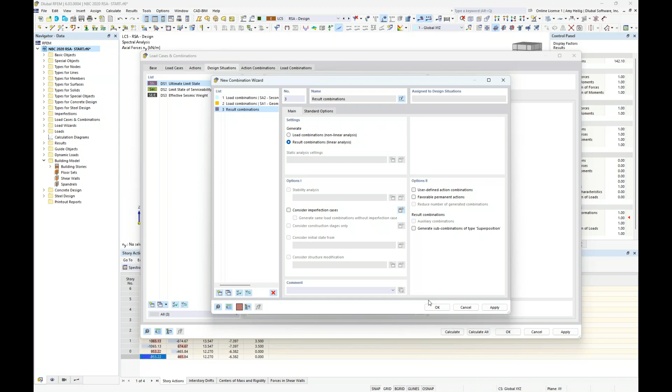So instead, we want to come in here for the ultimate limit state and go ahead and edit these settings here. Again, the default is set to second order analysis, but we're going to create a new definition type. And instead, we want to combine these earthquake results in a linear analysis using result combinations. So once we have selected this new definition type, we want to additionally select it here within our drop-down box for that ultimate limit state. And now we get a new tab called result combinations.

And sure enough, we see here dead, live, and snow, but we also see that earthquake load listed here from our response spectra analysis and the design. Notice also the sub-results. Currently, the scaled sums envelope will again reference the envelope solution from the 100/30% rule, 100% in the X, 30% in the Y. But if we wanted to consider one of these other scenarios, we could do so within the dropdown. But the default scaled sums envelope will take the max and min results here for this result combination.

We also see a second result combination with our elastic response spectrum analysis. And for this, we actually refer back to the NBC commentary 2015, and in particular, Appendix J, Note 111. And the commentary tells us that earthquake loads are considered rare. So there are no general requirements for SLS design when considering earthquake. Rather, we take a look at the specific elastic response spectrum analysis to make sure that our drifts, in particular under only earthquake loads, are limited according to what the code has set. Therefore, I really don't need to include this in my load combinations as well.

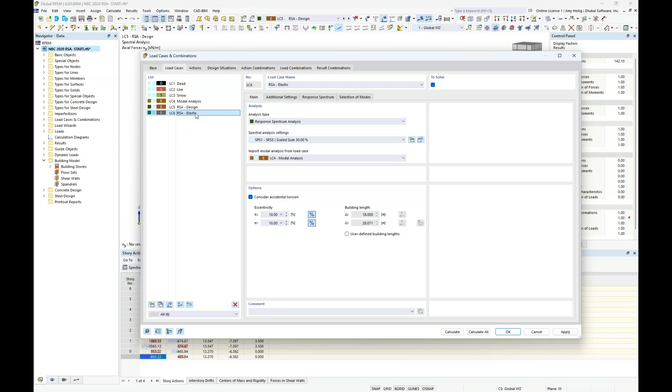So I certainly could go back to the load case and just uncheck the solve, but probably the better option under actions is you'll see here a separate action category assigned to my response spectrum for the elastic type. I can uncheck the active here. And now under my result combinations, we only have a single result combination considering that design response spectrum analysis.

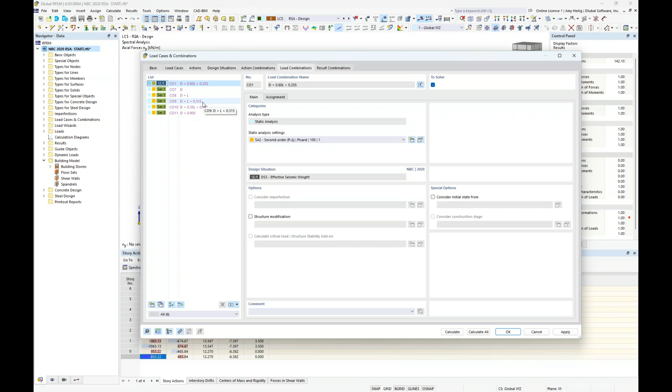When it comes to SLS design, we see here our design situation for SLS design. This is set according to second order. That's probably fine because we are able to combine now for our load combinations for SLS for dead, live, and snow. But again, for the ultimate limit state or ULS design, we can't do so with a response spectrum analysis. We must combine them linearly. Okay, so that will conclude our presentation today.